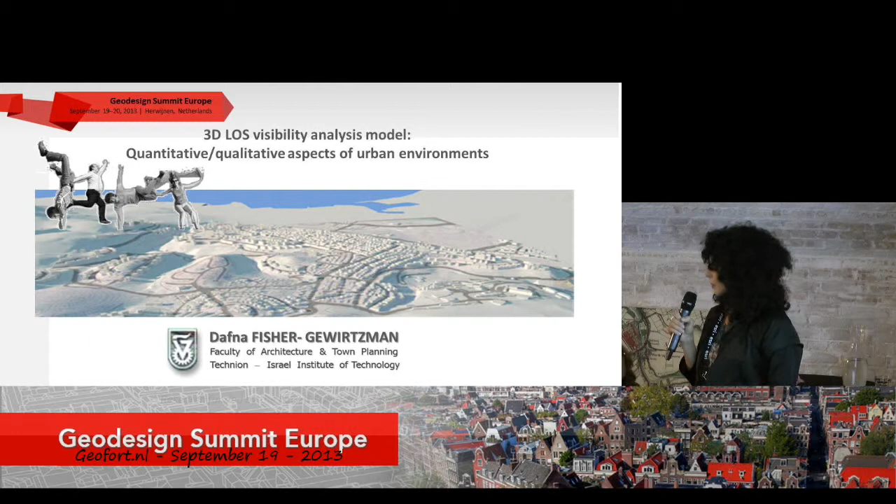I am going to talk about, actually it's very exciting for me to be here, since my major teaching in the school is adaptive reuse design studio for architecture students. So being here, it's like, you know, going to the right place to see how these adaptive reuse projects are lively, and I mean, here in the Geofort, well, we heard this, how do you say? Well, anyway, I'll go on.

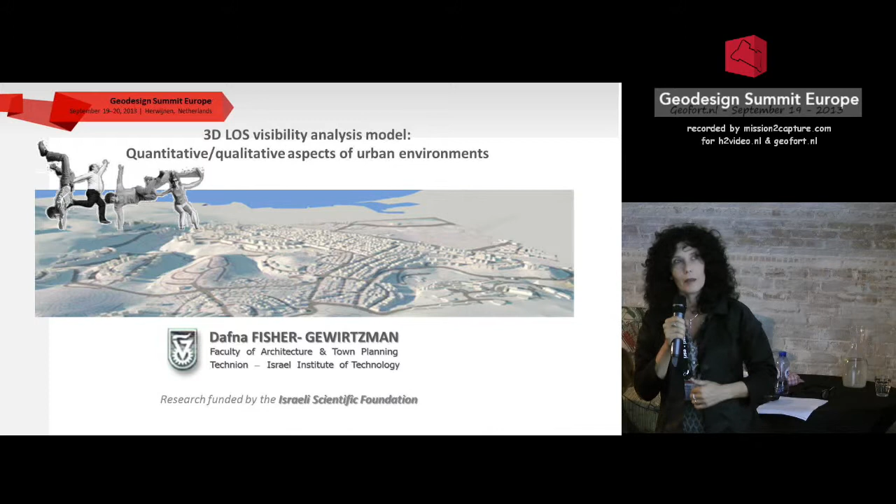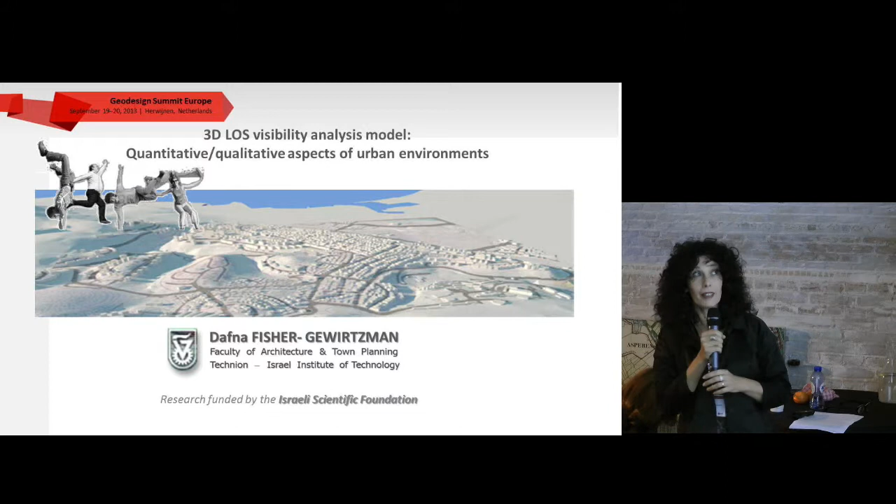My research is about visibility, and I'm going to talk about a current automatic tool that we're working on, a 3D line of sight visibility analysis model, which is trying to automatically quantify the qualitative and quantitative aspects of urban environment. And of course, what we want is healthy and sustainable cities for very happy and content people. And maybe even more happy.

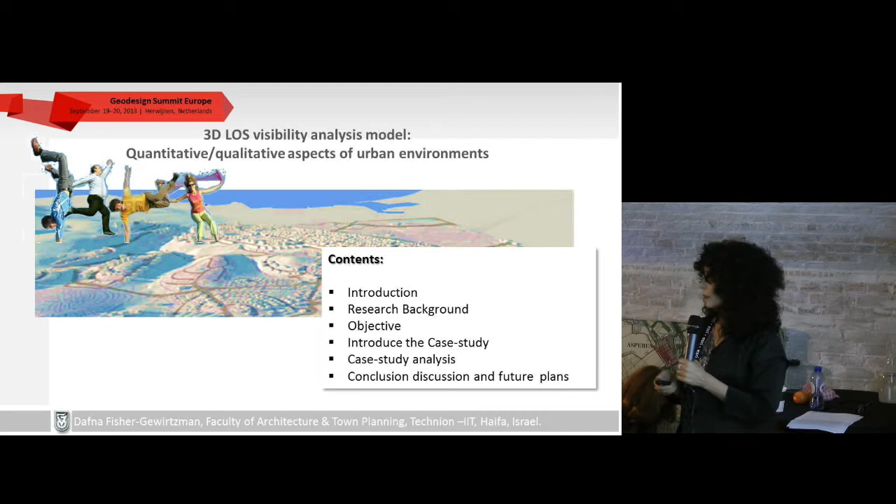So I'll give a very short introduction, some research background, very, very short, and introduce our case study and show you some analysis and, of course, conclusion discussions. So the introduction is going to be very, very short, since everybody's here because you all believe that our vision is one of the most important human abilities to actually perceive and understand environment, and we're living through, of course, all our senses, but visibility is very strong. And of course, the 3D representation of the built environment and the analysis must be part of a 3D reality.

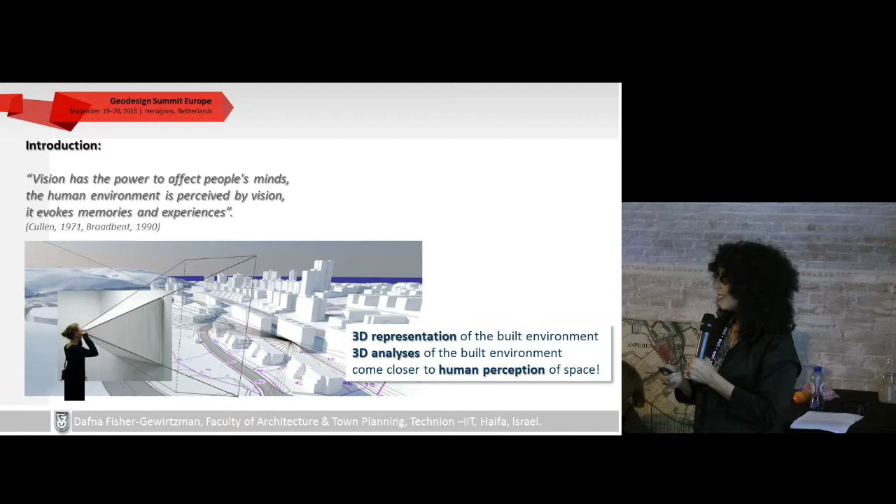So there are a lot of visibility analysis models that have been developed for the past, I think, quite a few years. 1979 by Benedict the Isovist is quite old, but you see that there are some point-based visibility graphs, Isovist and Isovist fields, automated Isovist measurements and tools, automated 3D visual analysis regarding human perception in space, and the complexity of course, and the accuracy in computing 3D visual analysis must be also mentioned, since this is probably the most important problem to be solved when you want everybody to actually be a user and not to be a technical person. It must be very, very easy to use.

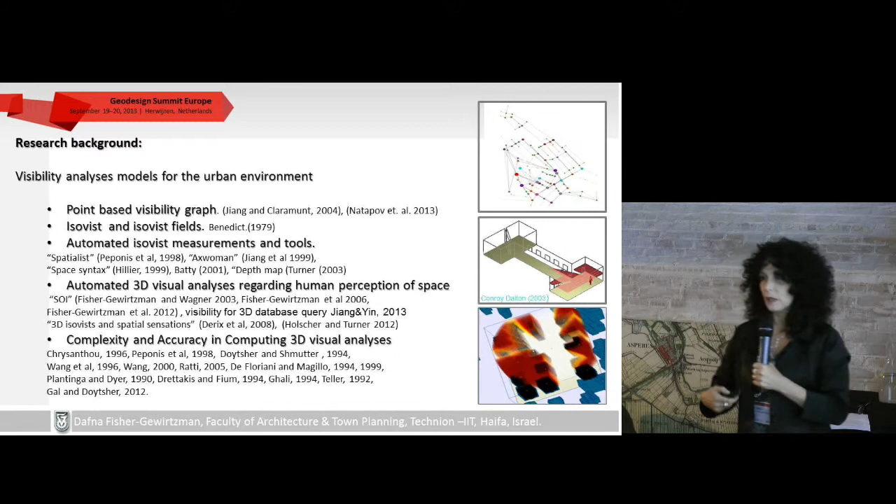So I started my way by trying to go into some kind of an attempt to measure the perceived density, which is, of course, qualitative, it's something which is very subjective. So how come I tried to measure it? So what I did in my PhD back, well, I never tell you when, was to try and see if there is a correlation, and I found a very nice correlation between the volume of visible space and the reaction to it when you ask people, how dense do you feel? What is your perceived density?

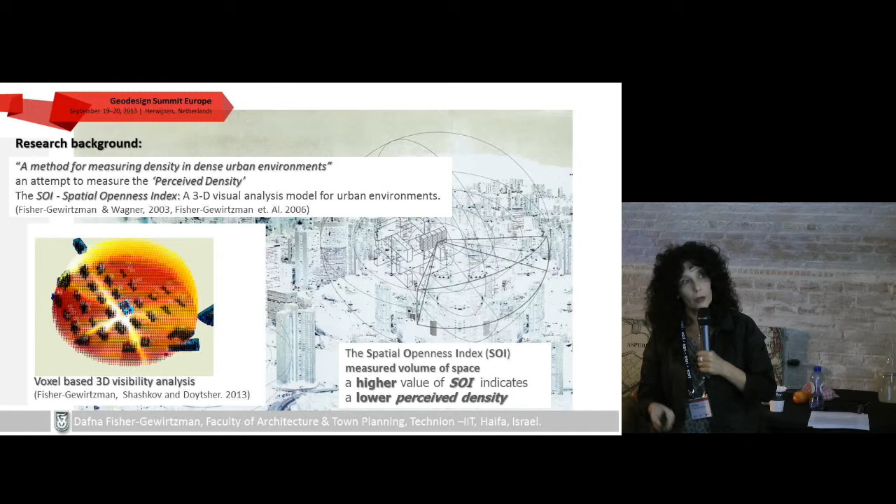So the spatial openness index, what I called it then, which measures the volume of space, the higher the value of the SOI indicates a lower perceived density. Since then, we have a voxel-based 3D visibility analysis together with Shashkov and Doytsher, which is the current SOI measurement. You can also read some papers about that.

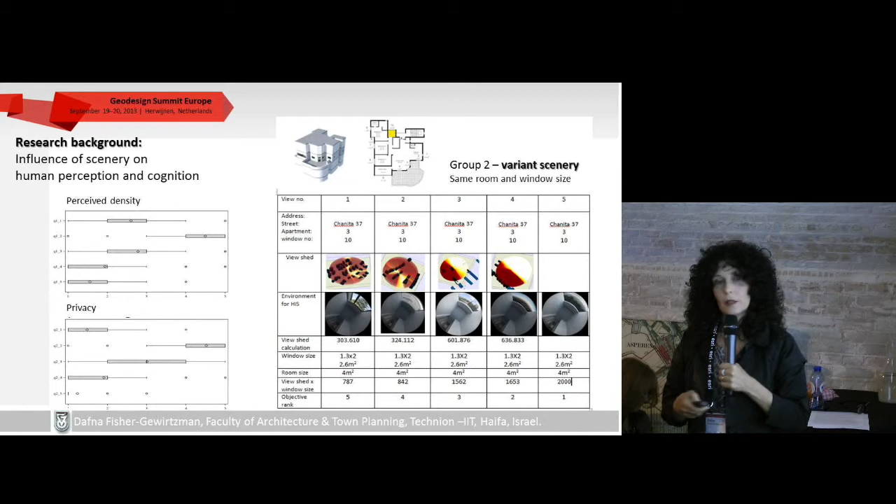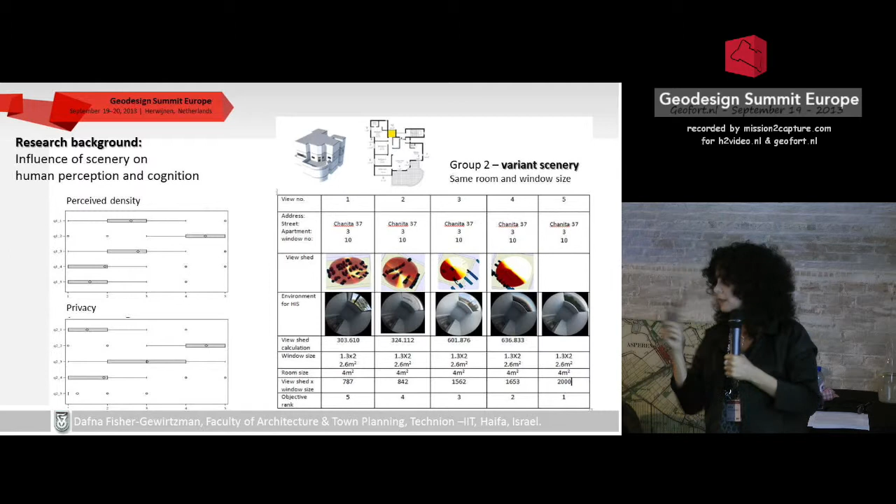And what we're also trying to do is see how the scenery is influencing people, the perception and cognition of people. And this is just one example when we try to put people inside an augmented reality and ask them about how they feel about the view that they're looking at outside. And since these were real views, we could actually measure how much open space there was. And we also got very nice tendencies with the correlations.

I'm sorry, I'm stepping over you, sorry.

So the current LOS-based 3D visibility analysis that is currently being developed with Elber, from the computer science faculty at the Technion, is a model that you can actually insert.

Oh, I'm sorry, I thought I was pointing. Yeah, right. No. I wanted to put the laser. Do you have a? In the middle.

Oh, okay. Now it's... so what do I do now?

Okay, so you can insert 3D SketchUp models. Every architecture student knows SketchUp, it's a free Google SketchUp software on the internet. You can create these physical, realistic, virtual environments and insert them inside.

And then we can analyze the view from this internal space in the room, looking out, pointing out something like 640,000 rays, lines of sight outside, and the outcome is a depth view.

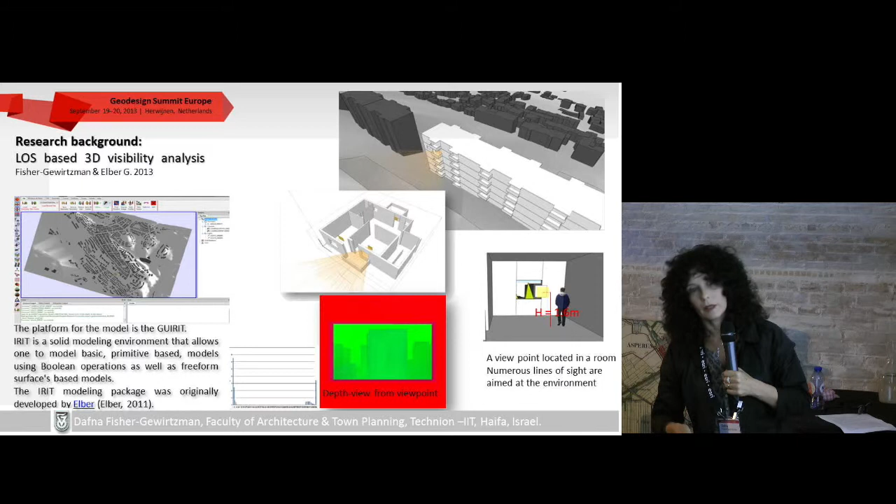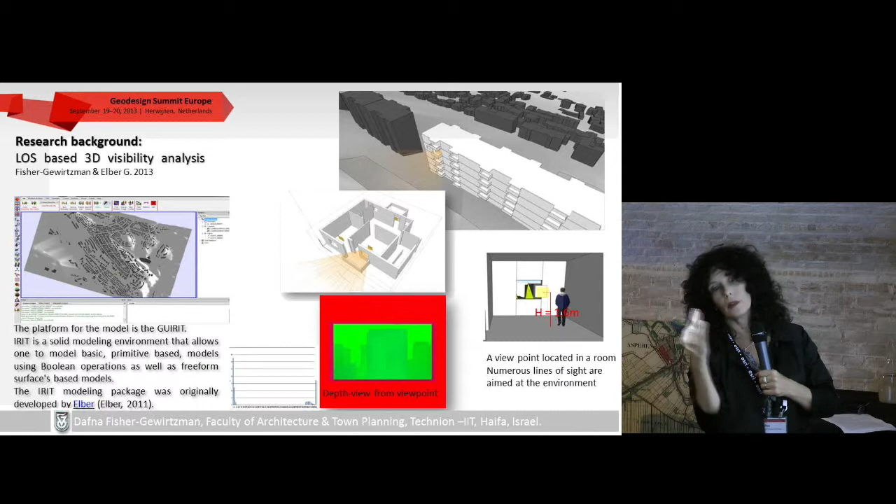This is not a very good depth view, but the red are the very short lines of sight that this person has around his window—just from his eyes to the wall. The green is as it goes back and goes further away.

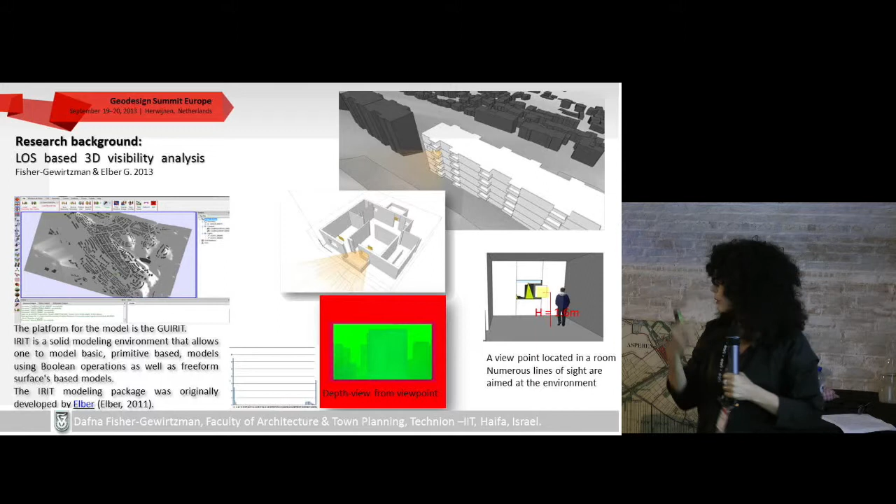You see some buildings from his window, and of course the sky. So it's not the real sky, but it represents the length.

So I'm going to jump to the objective and then show you the case study. What we wanted was an automated 3D visibility analysis model that enables integrative quantitative and qualitative visual analysis.

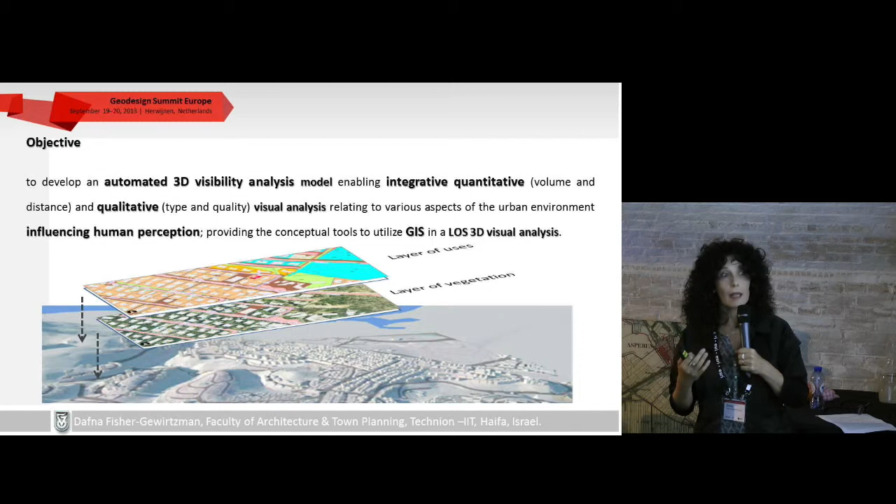We believe this is what influences human perception. And of course, we use GIS as basic and very important data.

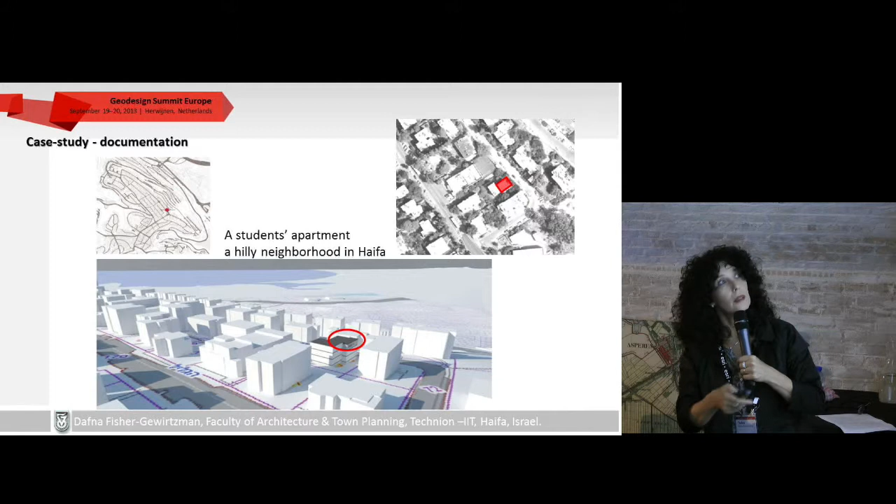So we have a student, one of 100 that we used in a bigger study. Each student that lived in an apartment—their apartment layout and the functions in the apartment were indicated, and of course also the view from each window in the apartment.

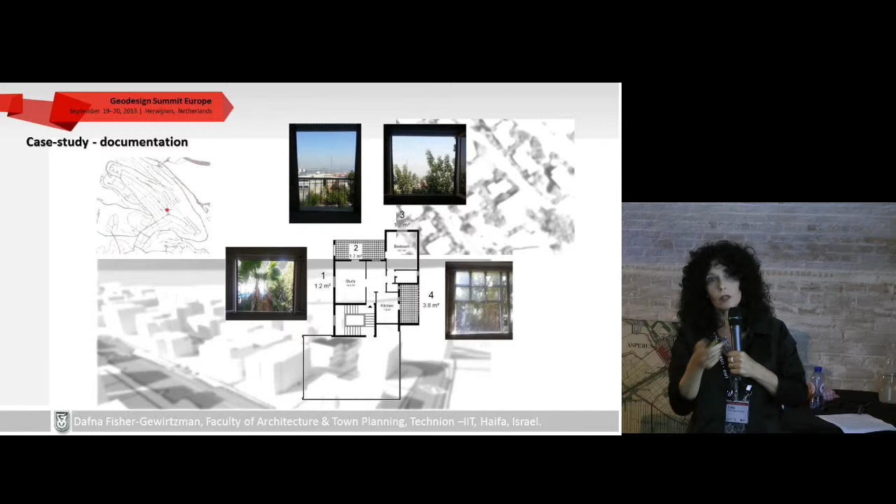So what we did was analyze the volume of visible space from each window, from each room in that apartment. And we asked these students—so that was the objective part of it.

We asked these students, are you content? Do you like your apartment? These were open questions. We also asked them questionnaires about their perceived density, about their privacy, do they like the view, what kind of view do they have, and so forth.

So this student was the one that made me think that we need to do something more—not else, but more than just measure the volume of visible space and the distances to various objects in the space, because there was a wonderful correlation in what we measured and what he said.

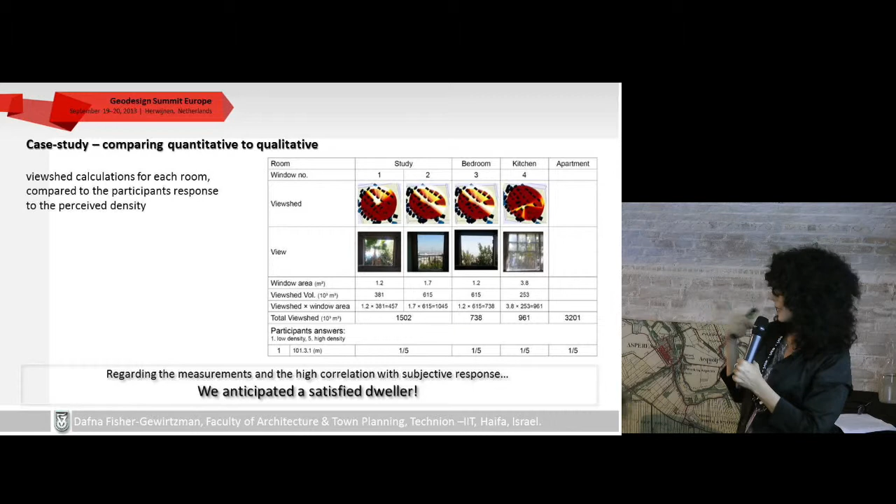From what we learned was that he had a very low perceived density. He had a lot of visual privacy. Nobody could actually see him inside his room or his study.

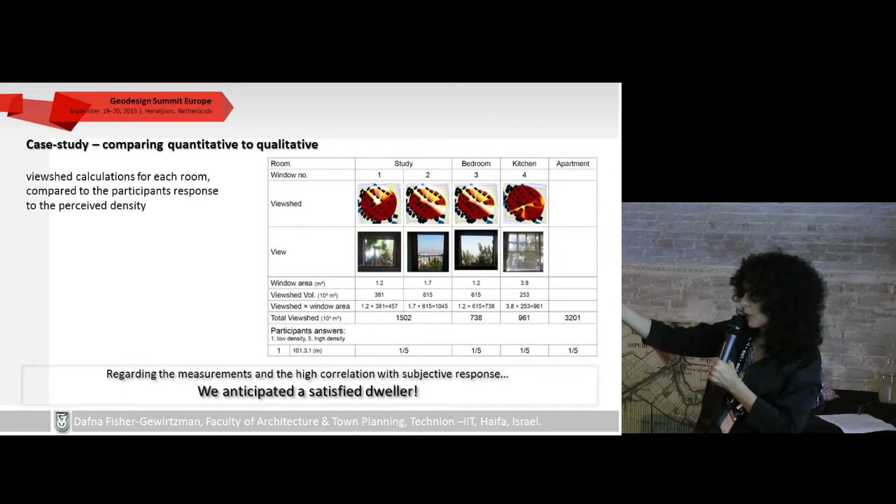He loved the scenery—I don't know if it's not very good pictures, but he can see the Haifa Bay, which is beautiful. When he didn't see the Haifa Bay, he saw beautiful trees. So everything was wonderful. So then, when we asked him, are you satisfied with your apartment?

He said no. He was completely wrong regarding my statistics. So then I looked, why? And he said, because a close-by school is a big disruption.

Of course, but of course when it's an architecture student who lives like that—he works all night and skips school because he wants to sleep in the morning, and then the school kids, it's a lot of noise. But what if it was a young couple with 2 kids?

This was great if they had a school. Five minutes or five seconds? Yeah, okay, so I'm fine.

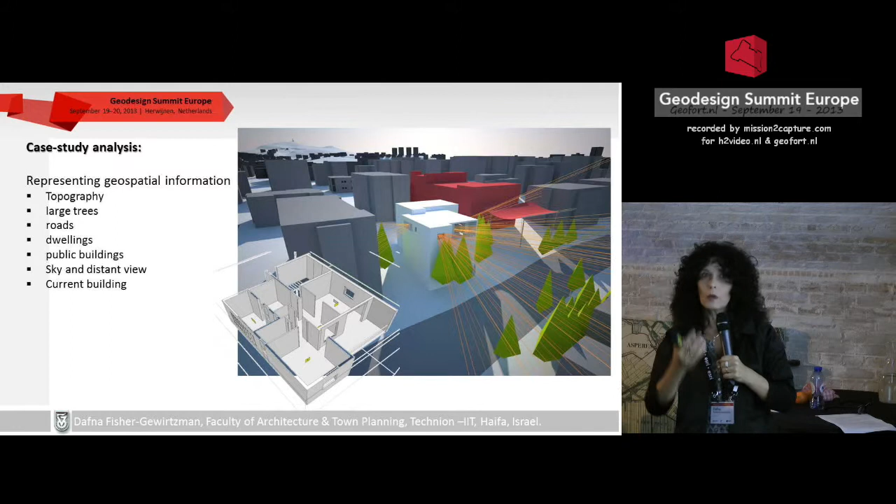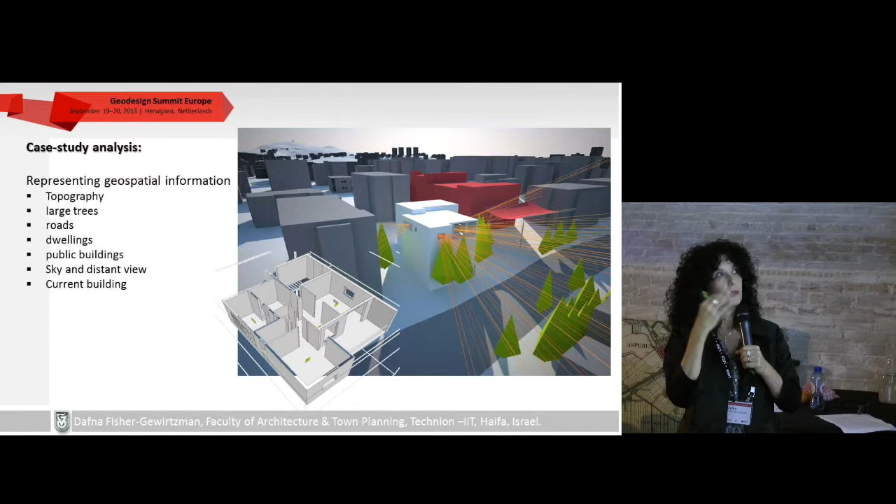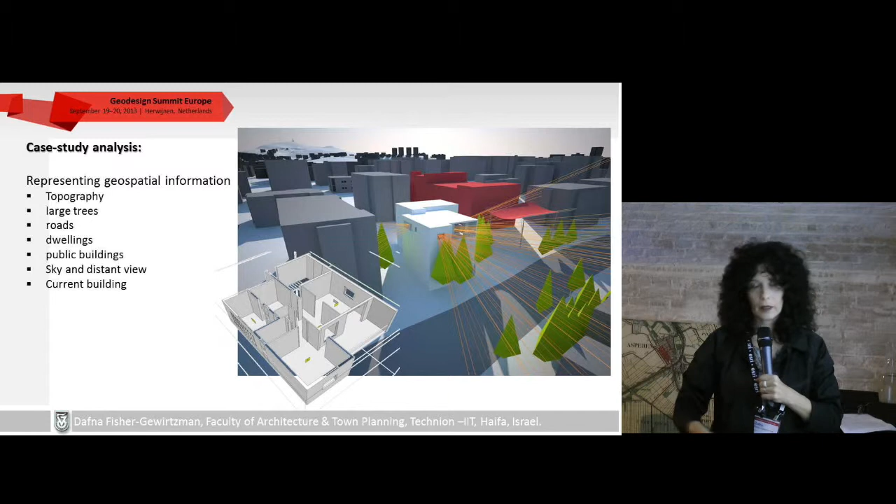Of course, this is not the realistic trees. So then we went back again to the analysis, to the depth view, but we incorporated different colors for topography, large trees, roads, dwellings, public buildings, sky and distant view, and current buildings—the current building being the building you're actually looking from, where the student is actually living.

So the first step was to get the full depth views for each window. Also, we have the terrace, doesn't matter.

I asked my computer science student, she's actually working on the software, to separate each element in the depth view. So you see, this is the internal wall around the window.

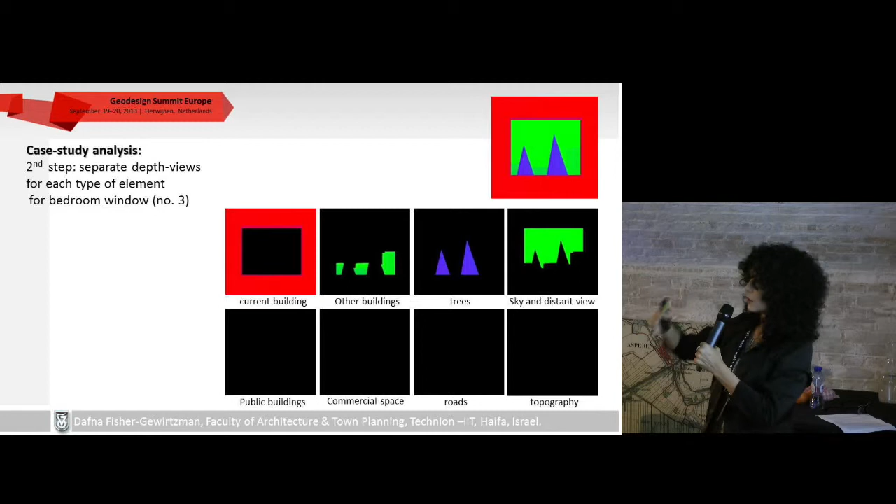There's quite a large percentage of rays that are into the wall. So what is interesting is more the size of the window. Because if we have a very small window, then of course it changes. But also I didn't want to get into it because it also depends on where you stand in the space. If it's very close to the window, then of course it doesn't matter if it's a very small window.

So this is where you see the other buildings around, the trees, the sky and distant view, and in this case there are no public building, commercial space, roads, and topography.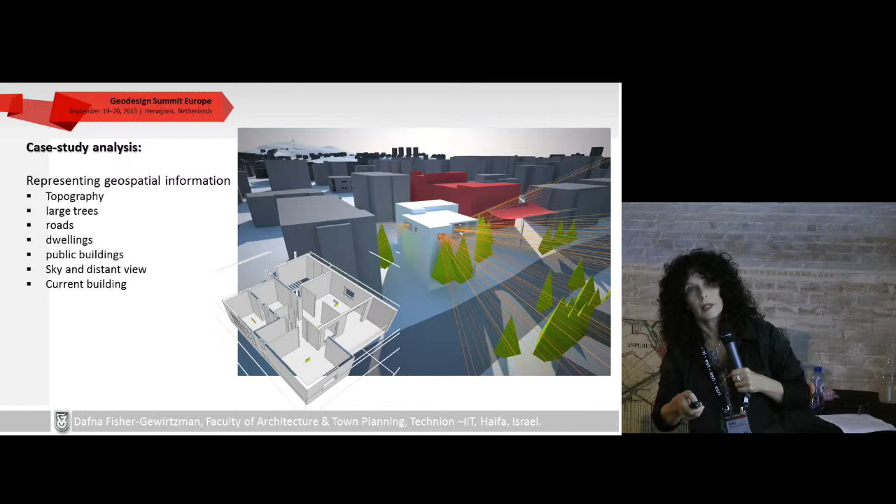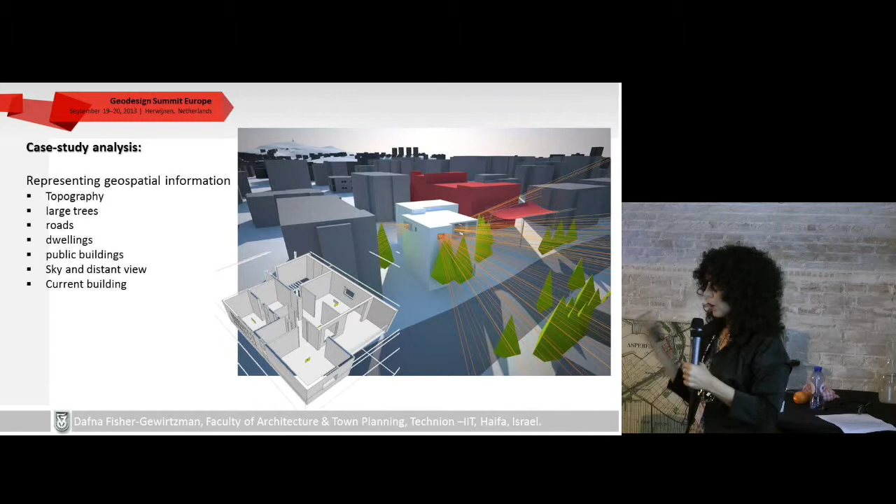Here, this is the school. And what he sees is just a little bit of this, which is like the cover. In Israel, you have to put a cover on top of every schoolyard so that the children don't get either wet or very hot from the sun.

So this is what he sees, and this means a lot of noise, a lot of hours of the day. So probably if we had known that, and taken that into account, we could indicate that this person, if he is a student, would feel very negatively about his apartment. Perhaps then somebody could say to him, you know, this is a beautiful apartment with a beautiful view, a lot of privacy, but please don't take this because you will suffer from the school.

Or if you were, so what do we actually need? Going back to my conclusions, perhaps if we had also layers of information about the profile of people using these apartments, and incorporated that into our analysis, it would be much easier for predicting how people will actually feel and react in different environments.

So this is an attempt to combine qualitative and quantitative attributes in one automated tool. It's just the first step, and we hope this will bring us closer to represent and perhaps predict the human perception in such built environments.

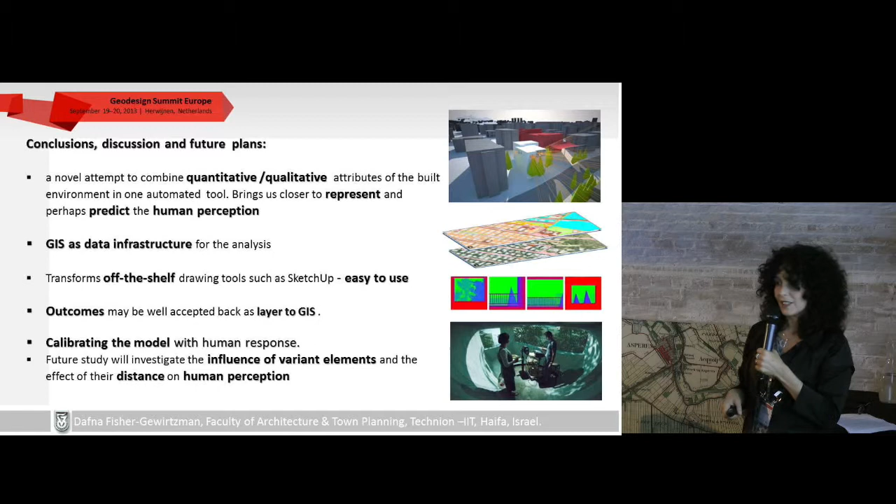And we hope to calibrate the model with human response, and here you can see some view from one of our visualization labs.

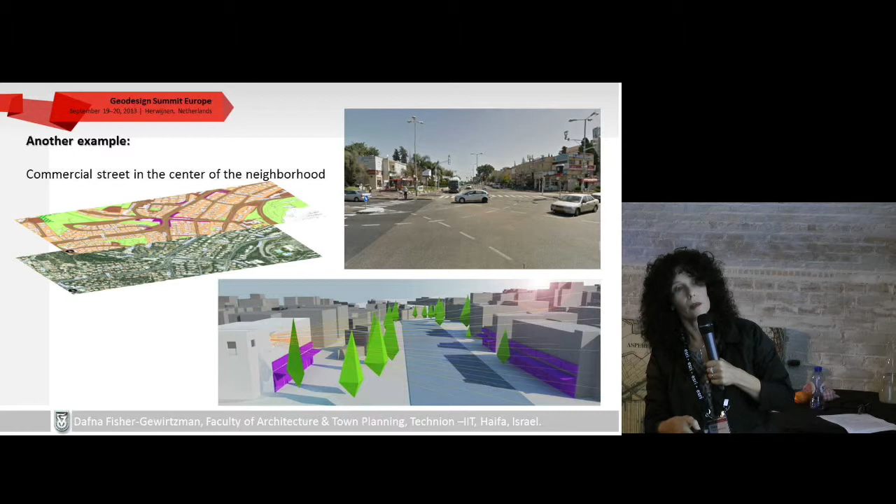Maybe just one small example: this is a commercial street in that same neighborhood. You see that the first floor, the street level, is commercial, and then there are some people living upstairs. So we could analyze what this person is actually seeing.

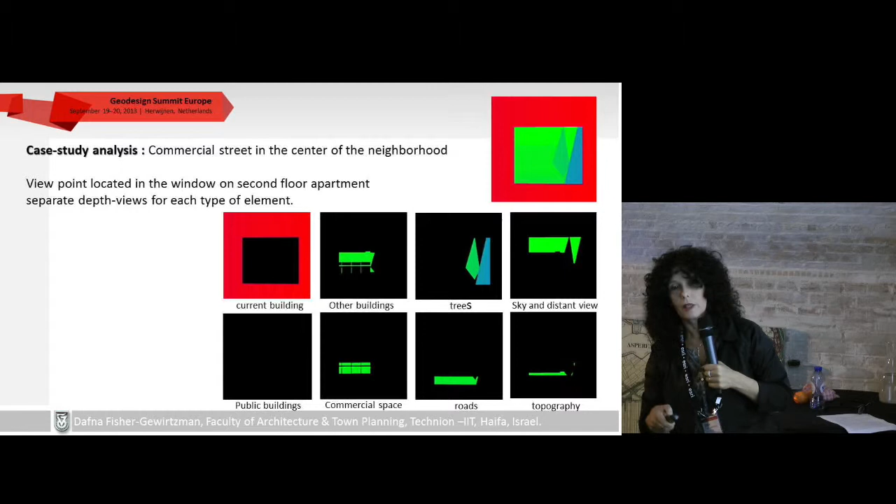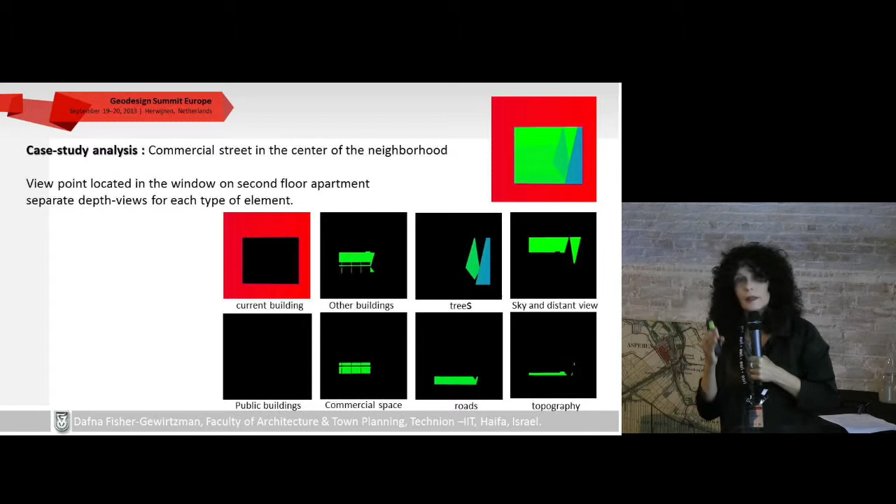And you can see that he can see the commercial space, he can see the road, and of course then we can divide it into different roads, and see, if you don't like busy roads, then you shouldn't live there, and so forth. So this is like separating and getting a lot of data in a much more comprehensive way.